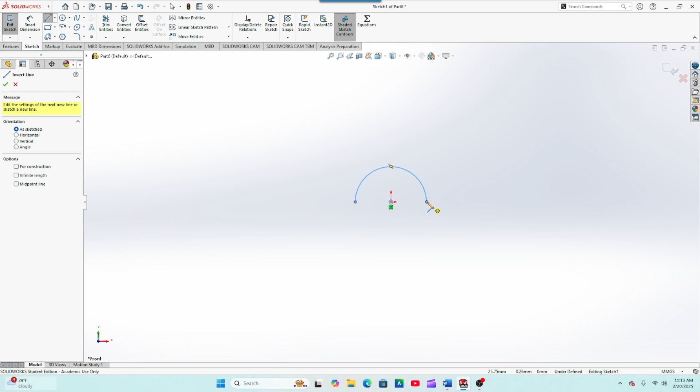To start out with, I am going to do a center point arc for this. I will start my arc by clicking on the origin, coming out approximately 25 millimeters, and come around here, then go to my line tool next, and we will do a straight line, horizontal line about 35 millimeters.

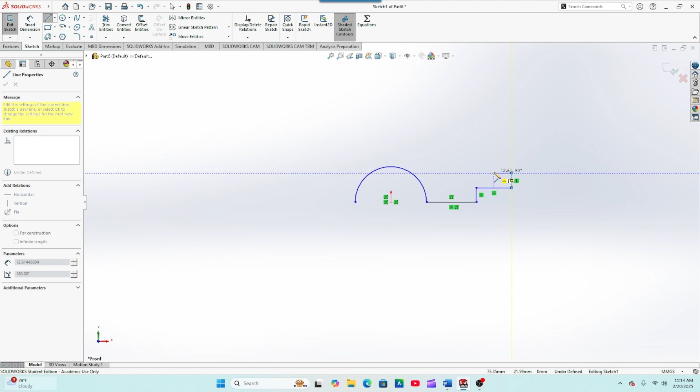We'll go vertical up about 10 millimeters. Here we're just going to kind of guesstimate about 25 millimeters. Then we'll go vertical up 10 millimeters. Do a horizontal line to the left about 10 millimeters, and then we're going to go up about 105 millimeters and click.

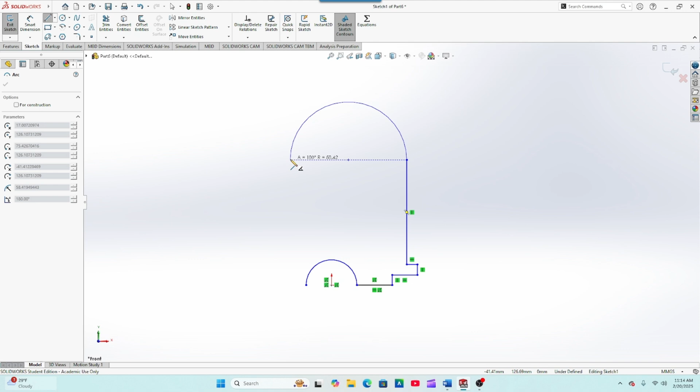Come out at an angle slightly to get our radius tool. We're just going to come out here about so. We're going to guesstimate we want about a 55 millimeter. Then we'll come straight down and click here, and exit out of our line tool.

I'm going to add a couple of relations real quick. We'll make this line and this line horizontal to each other.

And then we are going to begin dimensioning. So we'll start out at 10 millimeters. I promise you we will go to 10 millimeters. My keyboard is acting really weird today. I think there are ghosts or something in the house. I don't know. There we go.

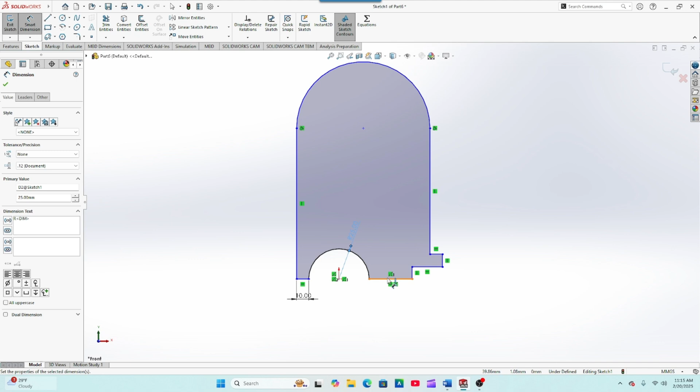Do our radius here. It's 25. We'll hit enter. Make this 35.

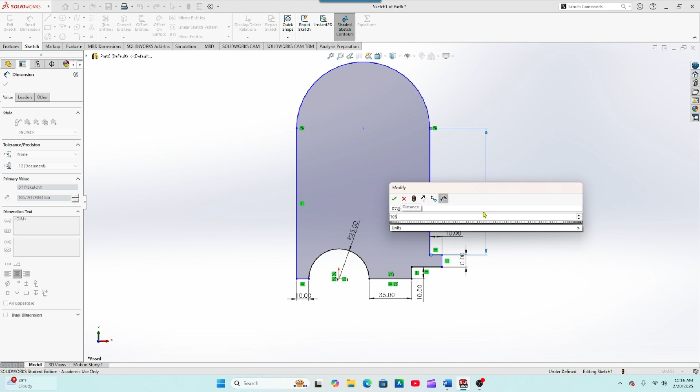Right there, this line will be 10 millimeters. This line will be 10 millimeters. And this line will also be 10 millimeters. This one will be 105. This radius is going to be 55.

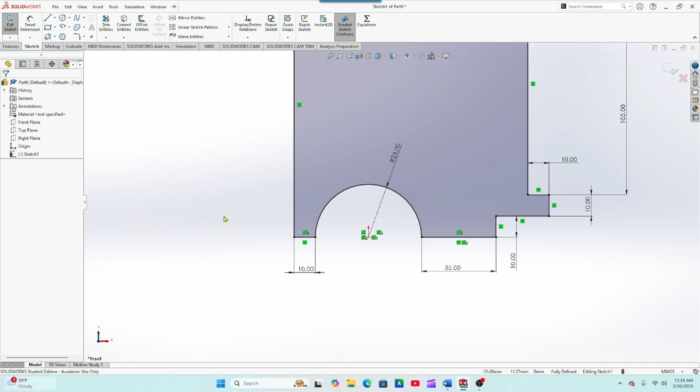And then we shouldn't have anything else left on here to dimension, but we'll have to figure out why we are not... there we go. So now we are fully defined.

And now I will go into my circle tool. Here I want to do a circle that is vertically aligned with our origin here, and I want to be about 120 millimeters distance from there. About there. We got about a 20 millimeter radius.

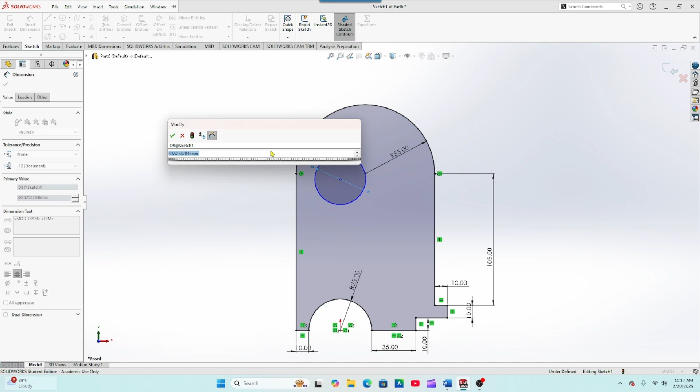We'll go ahead and dimension this circle to 40 millimeters. And then we're going to add this relation here.

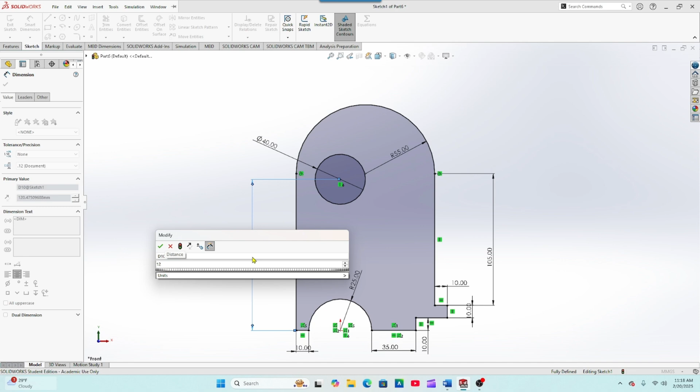And then we need to also dimension this to here, 120 millimeters. That locks that in place.

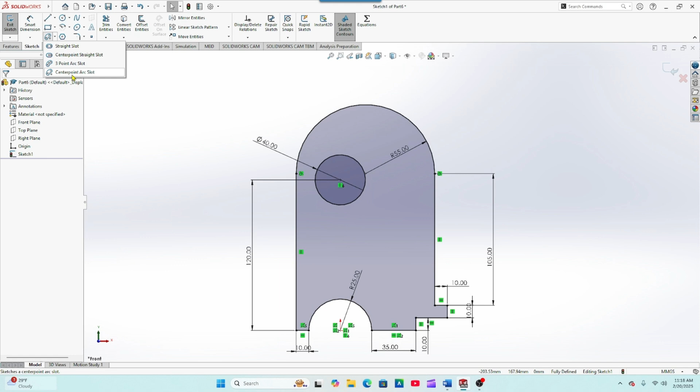Then we're going to go up here to our slot tool, and we want to do a center point arc slot. So we hit the drop down, you'll see that we have the straight slot, center point straight slot, 3-point arc, and a center point arc slot. That's what I'm going to go with right there.

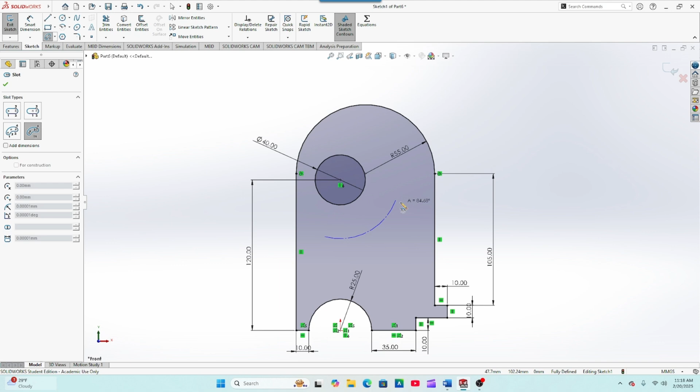I am going to click on the origin or the center point of this circle, and I'm just going to come down. I'm kind of guessing a little bit where to start this at, but right about here. And then I am going to go to about here and just come out slightly. And then I can start dimensioning.

The slot itself is going to be a radius of 10 millimeters. And then I want to dimension here. That will be 10 millimeters. And then we're going to dimension from here to here will be 70.

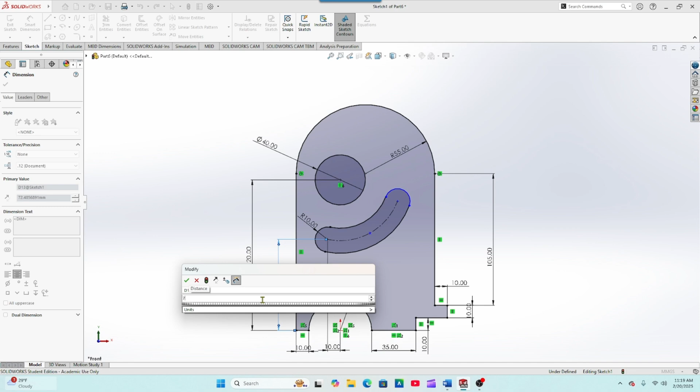There we go. And then the last thing that we need to do here is we are going to dimension that center point and this one, and that will be 90 millimeters. And we are fully defined, and we are done.

Pretty simple, not too difficult. Now you can draw this a couple different ways. You don't necessarily have to start this arc from the origin. You can start this corner here. Whatever your preference is, whatever makes it easier for you to sketch this, but you just want to make sure that you lock in your relations and you get everything dimensioned properly.